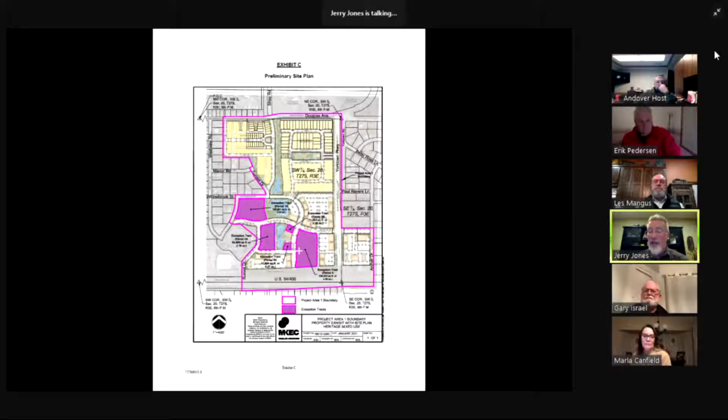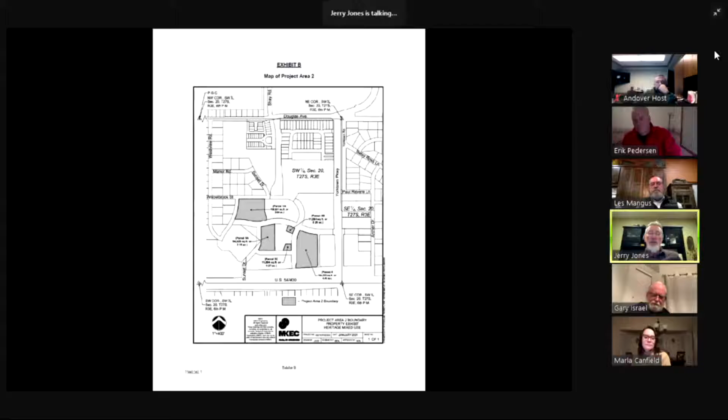Project Area 2 are again these five parcels, these gray areas, and this is the new part of the TIF project plan. The reason for this, coming back with this, was to catalyze and jumpstart the development of this commercial area. We'll talk a little bit more about how we intend to do that and how that all ties in with the comprehensive plan.

Again, some numbers just to give you an idea: Project Area 2 is approximately a $68 million project. Of that, $13.5 million is TIF funded for parking facilities. You can see here, this is the area, and we've got some plans that'll show this in greater detail, but this block is a vertical mixed use of ground floor commercial with a parking garage and apartments above. These two are pad sites for some type of restaurant or food service next to a town square. This is a hotel site, and this we refer to as a senior living site.

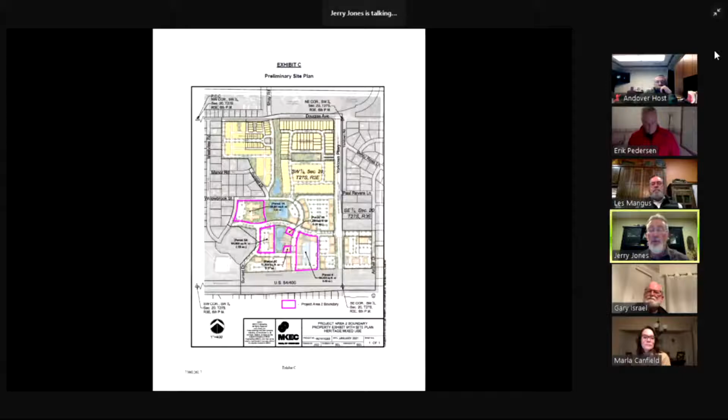So the main point we need to talk about tonight is how the project plans are consistent with Andover's comprehensive plan. I know staff gave you a good synopsis of that, and I'll just expand on it a little bit. This area falls within the US 54-400 corridor study. The comprehensive plan incorporated that study and features discussion about corridors in the city of Andover. I've highlighted, I think, one of the key parts of the corridor study and the comprehensive plan as it relates to the heritage.

The recommendations in the US 54/400 corridor study provide an opportunity to achieve a number of aspirations. First, create a core of the city that is currently lacking, the absence of which could hinder future growth. I've heard this over and over from your city council, that there's a real desire in the community

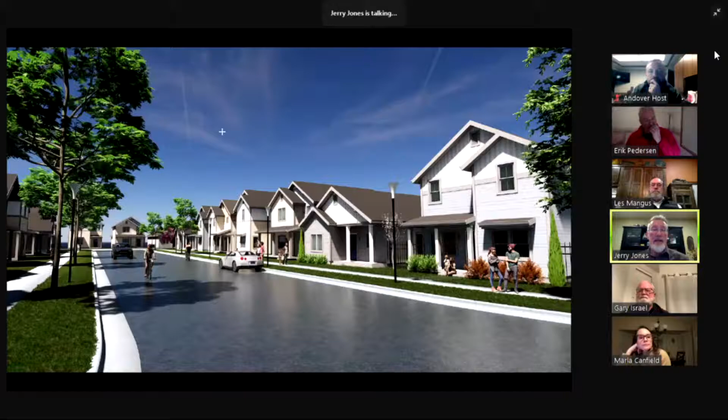Here's a slide that illustrates that. You can see those homes are being constructed right now. It's a little hard to understand the lay of the land, but essentially what you have is a residential street with sidewalks on both sides.

Homes that are up close to the street and the sidewalks—most will have front porches, and these have alleys, with parking in a garage off of those alleys. This is somewhat unique, at least to the Wichita metro area, and again another way this plan fulfills the goals of the comprehensive plan.

Going back to the parks—they continue all the way through the project, as shown on your comprehensive plan, tying it all together. There will be walking and biking paths that tie into a system that goes off-site and continues to the north along Yorktown Parkway and to the south along Yorktown Parkway across Kellogg.

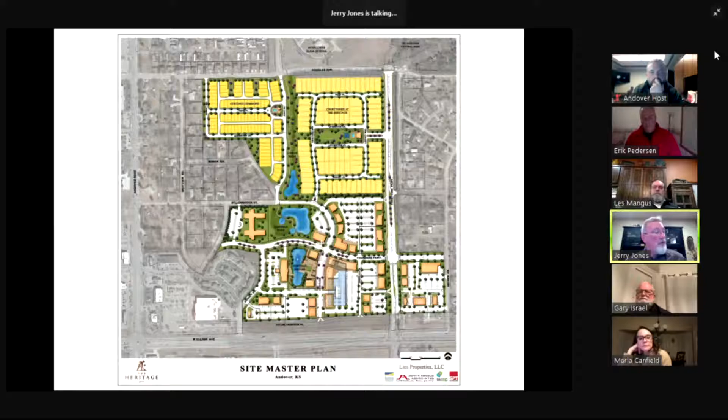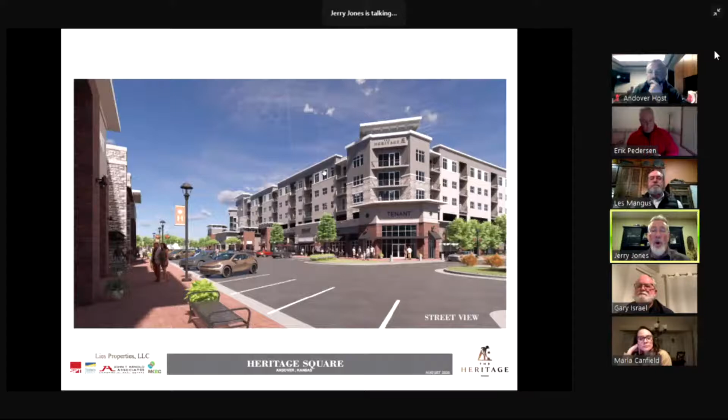This image is to illustrate those active street fronts. One thing I want to point out is we're not developing a shopping center here, we're really developing a main street. So you'll see restaurants and bakeries and shops of that type. We'd like to see some sidewalk cafes. We anticipate there will be some retail, but there will probably also be some service retail and offices, and it will be a mix of all those.

And just like any main street you might see anywhere, you might go to the coffee shop for your breakfast, open up your office, go to the barber at lunch, go see your insurance agent after lunch, and then go eat at a restaurant in the evening. So it's really intended to be a mix of uses, and with the apartments above, to be an active area not just during the day, but also into the evening.

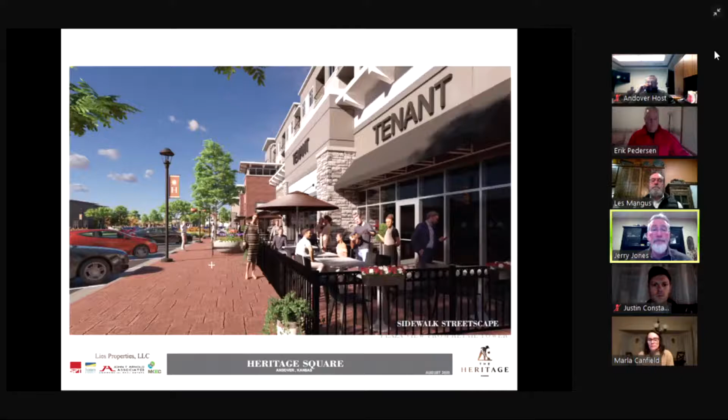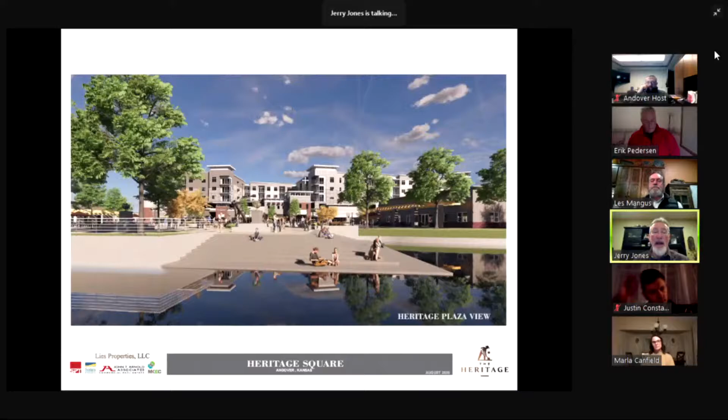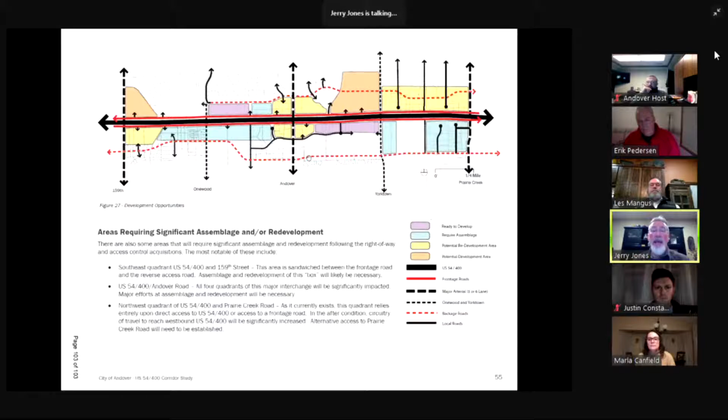I also need to touch on another piece of the comprehensive plan, and that has to do with transportation and access. Again, Les brought this up, I think, in the materials that were provided in your packets. But what's key to understand here, this is Kellogg. This is a diagram from the corridor study, and the corridor study introduced this idea of backage roads. In this red dashed line, both running east-west, both on the north side and the south side of Kellogg, are the planned alignments for those backage roads.

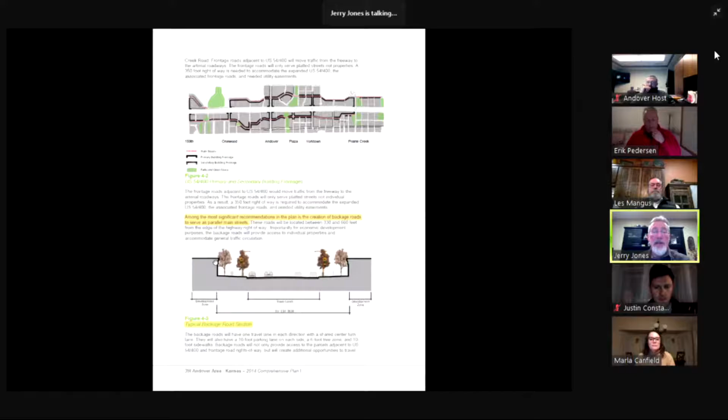Here's a cross section of that with the street, and again you can see the buildings oriented onto that road. And lo and behold, this is that backage road as it passes through the heritage, and we call it Founders Parkway. This will really be the spine for the commercial areas and mixed use areas, and is planned to connect far beyond, running east and west beyond the bounds of the heritage project.

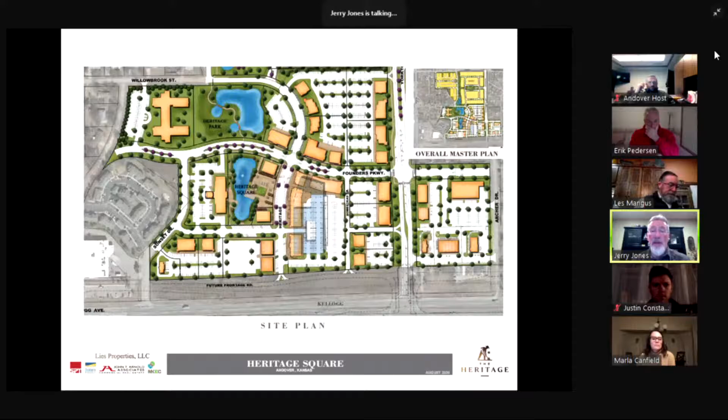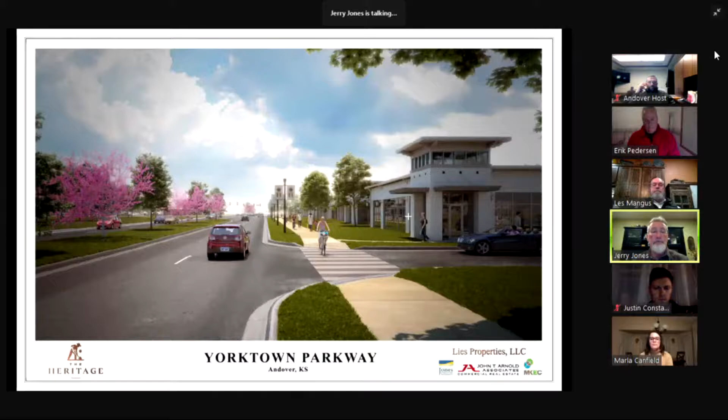This is impressive. This is going to be fun. I had a question, and I don't know if it's as much for you as Les. And thank you, Jerry. Thank you very much for that.

Are there - and you helped me a lot with the example you gave of you can eat breakfast here and then open your office and go see your insurance agent - are there certain types of businesses that are not allowed in this commercial area? I'm assuming like even light manufacturing is not going to be here, and things like that. Sorry if it's a silly question, but it was in my head.

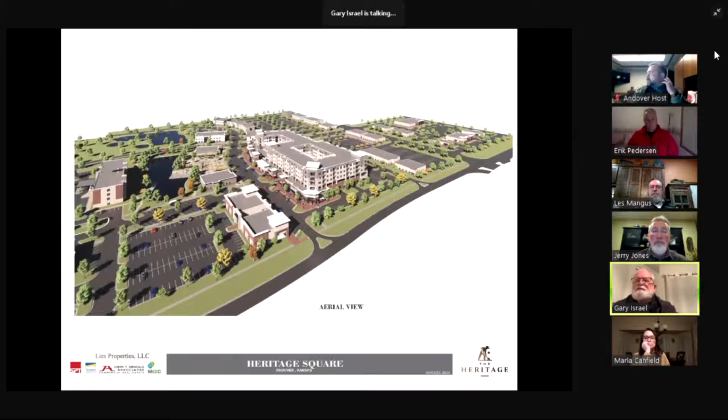Jerry, this is Gary Israel. In doing this, what do you see as the first building that's going to go up? Would it be that main building right there in the center section? Or would it be a hotel or a restaurant?

It's a good question, and this plan will definitely be market driven. So what I will say is we are working right now on plans for this apartment project and the garage, and then the commercial that goes with it. But it's a huge project and it's going to take a few years to get completed. We're working to get this under construction this summer.

I would say in terms of getting businesses open, that may more likely occur over here at Yorktown and Kellogg, where we already have some interest from more conventional commercial type uses. And it wouldn't surprise me at all to see one or two businesses pop up over here on the east side of Yorktown before we can get this going.

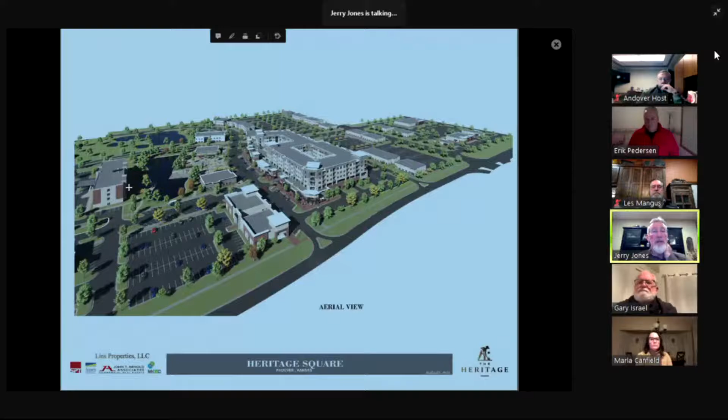But I think once we get this up vertical, then we hope to see some ancillary restaurants. You mentioned the hotel, and again, senior living - those people that operate the senior living developments have got their hands full right now with COVID, but before COVID that was a very active segment. So that could come on soon as well.

It's probably too early in the game to ask this, but I'm curious - this has certainly generated a ton of excitement and buzz outside of Andover. Have we started to see retail or service establishments raise their hand and reach out to us, asking where do I try to get in line to be part of this and look at putting a store there? Or am I too early in the game?

I'll take a first stab at that, from our project, and then I'll let Les talk about it from a broader perspective. On our project we have had inquiries. My experience - I developed Newmarket Square for the Slawson family in the early 2000s all the way up to 2017 - is that retailers...

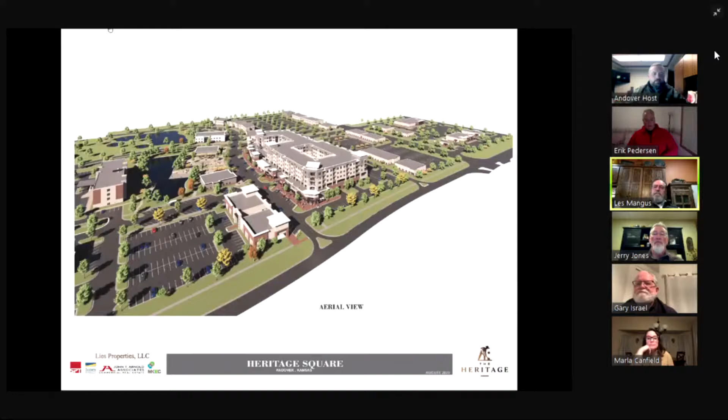Well, hearing no other questions, is there anything, Gary, Marla, or Kirsten, that needs to be discussed around the topic? If so, please chime in. And if not, I'll entertain a motion. Did we hear from any, I don't know on this one because it says public comment. Did we hear anything public comment wise on this one?

Thank you, Marla. I had checked with Justin earlier today, so I probably took that for granted because I knew the answer. I'm sorry. Thank you for bringing that up. As of when I checked earlier today, Justin, there had been nobody sign up to speak. I assume that's still the case. And if so, has there been any public comments received?

You were correct, Erik. We haven't received any public comments or any formal comments or anything like that. We did email briefly with a resident that was interested in basically what was on the agenda this evening, just for clarification's sake. But other than that, no formal request to join the meeting tonight.